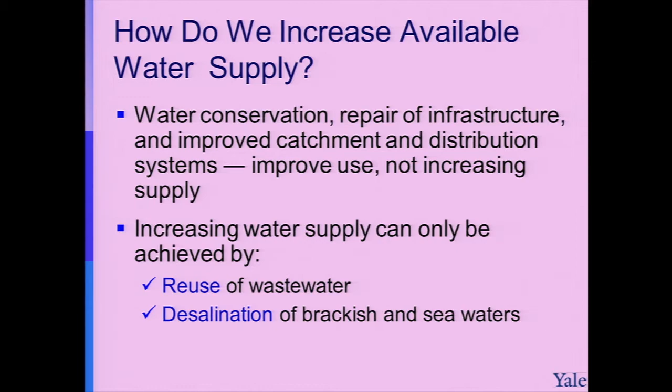The only way to get more water than what we can get from the hydrological cycle is to turn to engineering, my discipline, engineering and applied science - either reuse wastewater or desalinate brackish water or seawater. So my talk will focus on desalination of seawater, and I will address the question of whether it's really one of the ways to combat global water scarcity.

There was also a report by the National Academies about desalination, focusing mostly on the United States, discussing the technology, the economics, sustainability, and many issues. Those of you interested in desalination, especially in the context of the United States, I highly recommend reading this very comprehensive report.

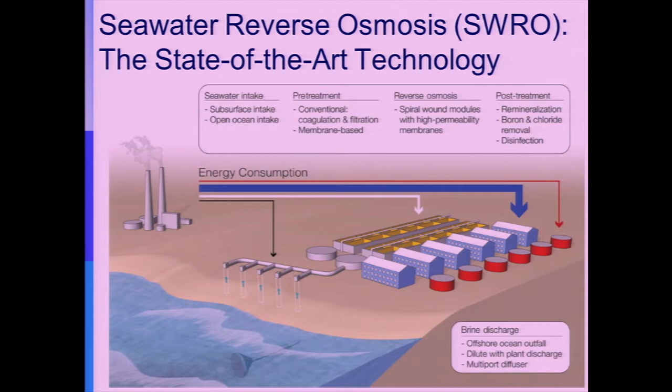In this technology - a typical reverse osmosis plant - the thickness of this line tells you roughly the energy consumed in each stage. You take seawater by an intake structure, it goes through some pre-treatment, similar to how we treat water for drinking supply - for example, if you take water from the Charles River and treat it for drinking water, it goes through a similar kind of pre-treatment. Then it goes through the heart of the process, the reverse osmosis unit - semi-permeable membranes that, in principle, let only water go through and retain all the salt. There's also post-treatment for other purposes we may discuss later, and whatever brine results is eventually discharged back to the ocean. So this is generally seawater desalination by the leading technology nowadays, reverse osmosis.

Numerous desalination plants were constructed all over the world, and I'll give you some prominent examples. In Spain, by this year, they completed a big master plan of 1 billion cubic meters per year - 1 cubic meter being 1 ton or 1,000 liters. It's a huge amount, and later we'll relate it to energy. This is mostly for agriculture, tourism, and potable use.

Israel, within a year, will complete a master plan of 5 desalination plants along the Mediterranean. They've already completed 3 big ones and will have 2 more, totaling 0.5 billion cubic meters per year - again because there's not enough water, mostly for agriculture. In my opinion, for the future, if there's ever peace in this area, water will play a very important role, and I think these desalination plants will play a critical role in that.

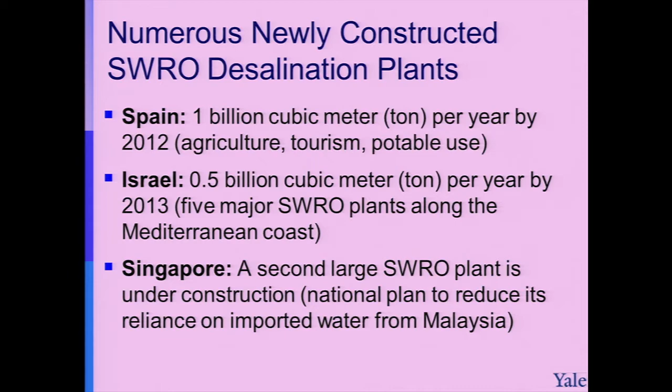In Singapore, they just finished their second desalination plant. They're already recycling all their wastewater, and now they'll have seawater desalination too, because they want to reduce their reliance on water from Malaysia - they were getting up to 60% of their water from Malaysia and want to reduce that reliance. So these are some examples.

For those of you who just want to see, since not all of you are scientists here, how a desalination plant looks - this is the example of the one in Hadera, Israel.

It's a 130 million cubic meter per year plant, the largest reverse osmosis desalination plant in the world. And they're just now finishing the one in Sorek in Israel, which will be 150 million cubic meter per year. This one is close to the power plant in Hadera, just south of Haifa.

Again, the heart of the process are these membranes, which are put into long pressure vessels. These are the membranes that do all the desalination.

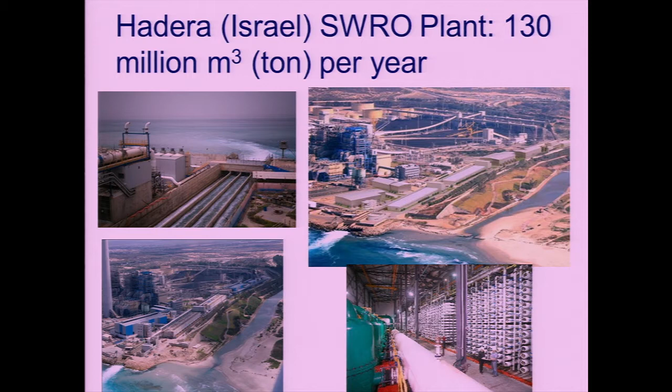So, a few words about desalination. In principle, it offers an unlimited and steady supply of water. The ocean is vast, and no matter what desalination plant you run, you will never deplete the ocean. So we have plenty of water - that's one good thing. Another good thing is you can produce enough water for potable use and agriculture without affecting the ecosystem. If you take water from rivers, lakes, and groundwater, you can have an adverse impact on the ecosystem. So that's another advantage.

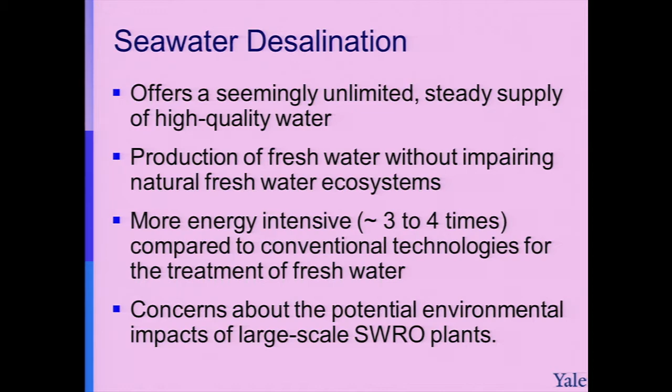However, there are of course disadvantages. It takes about 3 to 4 times more energy in the form of electricity to desalinate seawater compared to the way you treat, for example, water from the Charles River or from any reservoir. There are also some concerns - some of them serious, some maybe not - about environmental impacts, which I will touch upon during my talk. So there are some good things, but like anything, there are also some bad things.

Last year I was invited to write a review article in Science about the future of seawater desalination. In that article we posed 4 questions, which will guide my talk, and I'll show you even some newer data beyond what we presented there. We addressed what we thought were the key questions for desalination.

First, what is the energy efficiency and how far can you improve it? Because you can hear some people come with this magic solution to desalinate seawater with 5% of the energy of what you have now, and I want to set all the facts straight here.

Secondly, a lot of material scientists go into this area, and the question is: can material science and advances in material science reduce the energy consumption? I will highlight some of the hot areas of research and what's good and bad about them.

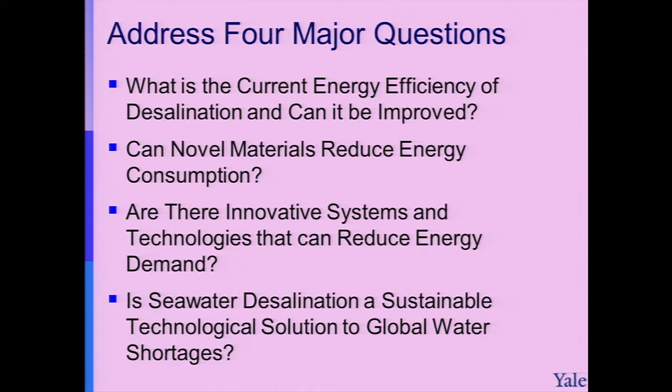Then I talk about some technology. I mentioned that reverse osmosis is currently the leading technology, but let's see - maybe there are other technologies that can reduce the energy. Lastly, we always need to ask if desalination is sustainable, and I will try to say a few words about the sustainability of seawater desalination.

So let's start with the first question: what is the current energy efficiency of desalination, and how much can we further improve it? I will start with some data.

Now, reverse osmosis technology was developed in the 60s, and the first desalination plant was roughly in the 70s. The energy consumption there was huge, and it dropped dramatically, and nowadays we are roughly about here. So I will zoom in on that part, and you see it here.

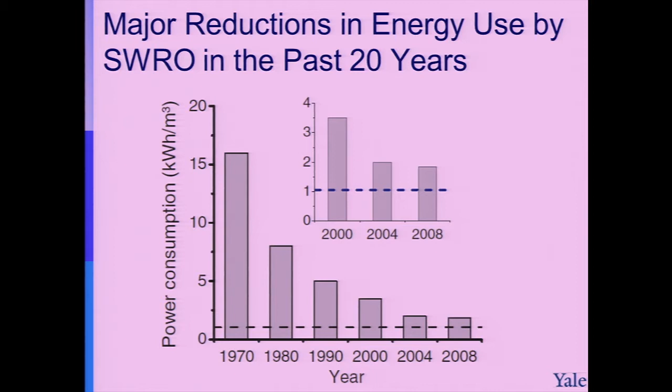Here you can see a dashed line, and this dashed line describes the minimum theoretical energy of desalination. You can use thermodynamics to analyze what's the energy needed to just separate water from salt. You assume a reversible thermodynamic process, which in principle isn't practical - it would be infinite in size and give you just a few drops of water. But this is a good reference to start with. I'm emphasizing that this thermodynamic limit is independent of the process you develop - you can't come up with another process and tell me you have something that can do it better. You can't.

So if you do this calculation for seawater, which is about 35,000 ppm, you see for zero recovery what percentage of fresh water we get from the seawater. If you take 1 drop, which is zero recovery, it takes 0.76 kilowatt hour per cubic meter. But again, it's not practical to have 1 drop - desalination plants work at 50% recovery.

You cannot have more than 50% recovery, because then you'd need such high pressure that the membrane cannot tolerate it. So all desalination plants work with 50% recovery. It means if you have one volume of seawater, you get half as fresh water and half as concentrated brine, and for this you need about 1.1 kilowatt hour per cubic meter.

And as you've seen here, we are about, again, the best RO plants are about 2. Now, emphasizing, this is just for the reverse osmosis stage, just for this desalination through these membranes.

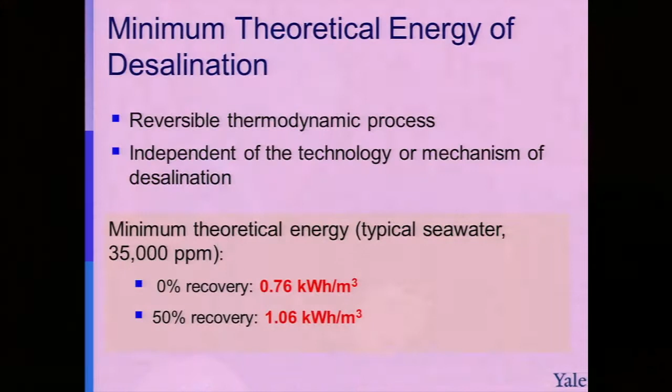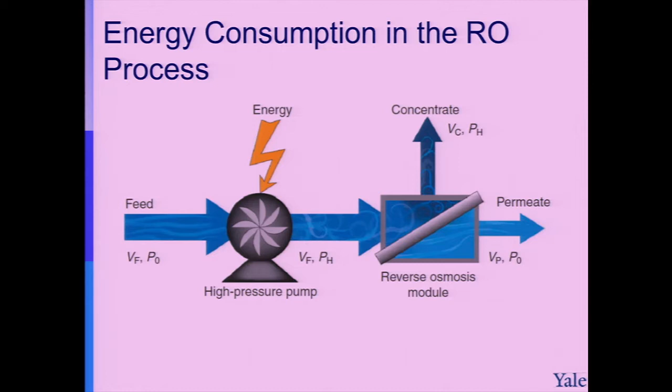Now, putting it in context to the minimum energy of desalination, the way you desalinate, and I showed you this picture of these long vessels, you can think about it that you are at the beginning of the vessel and you have the seawater here. And the seawater has a certain osmotic pressure, let's say 25 bars.

And as the water goes into the vessel, you start to get fresh water, and then the salinity of the water increases, and this will increase the osmotic pressure. So this is the exit from the vessel, where you get the brine and you collect all the fresh water.

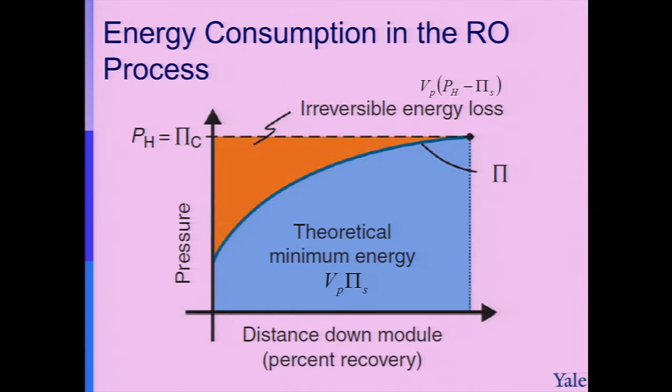So the way you operate seawater desalination, first, based on this diagram, you must apply a pressure at least equal to the osmotic pressure of the brine, because if it's not, the last part of the membrane module, the water will go in the other direction. You will not get desalination. So this is very important when you talk about the minimum energy of desalination.

And if you follow just the thermodynamics, the area under the curve is the theoretical minimum energy, which I mentioned is 1.06 for 50% recovery. And anything above that represents irreversible energy losses inherent to this process.

Now, in reality, you apply a little more than this pressure equal to the osmotic pressure of the brine, because there are some pressure losses when the water flows in the module, and there is some concentration polarization in which the salt next to the membrane is slightly elevated, so you need a little more pressure.

Now remember this one, when we talk about materials and if they can reduce the energy, I will refer to this graph again. So let's define another minimum energy.

Because we must operate at a pressure at least equal to the osmotic pressure of the concentrate that comes out of the pressure vessel, we can take this pressure and calculate what's the energy that's needed. And the energy, if you do the calculation, is simple. It's just you take the one cubic meter of product water times the osmotic pressure, you play with the units, and you can get 1.56 kilowatt hour per cubic meter.

So remember this number, this is what we call the practical minimum energy, and you assume that everything is ideal, the pumps and the pressure exchangers, which is not the case. And the best desalination plant, at least what they claim, has a reverse osmosis stage that uses about 2.

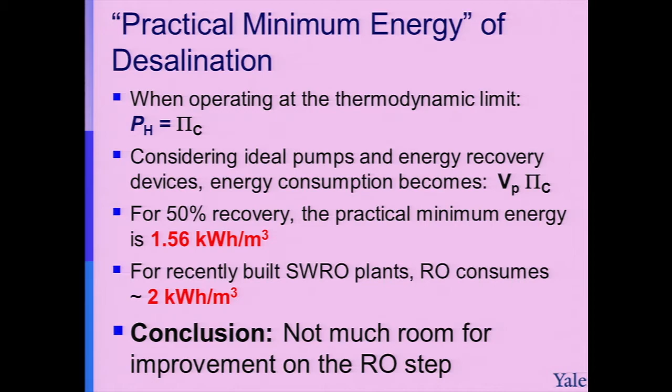So you can see now that, one of the conclusions, there is some room for improvement, but not dramatically. You cannot improve the efficiency by a factor of 2. But there is some room, and any 5 or 10% improvement, when you talk about billions of cubic meters per day, translates to a lot of energy.

So to put everything into perspective, the thermodynamics tell you it's 1.1. The practical minimum energy, because of the way we operate desalination plants, is about 1.6. The best desalination plant's RO stage gives you about 2.

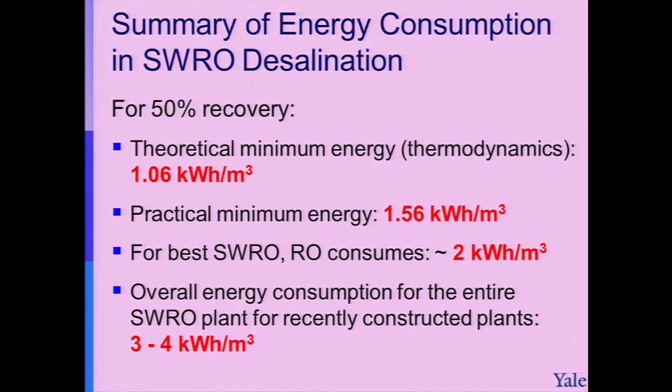But when you look at the reports for all the newly developed plants, the overall energy of the entire plant, you see it's between 3 to 4 kilowatt hours per cubic meter. So much more than what you see here. And the reason is, if you look at this plant, there are many other things that consume energy. You have intake, you have pre-treatment that costs some energy, you have some pumps, and all of these.

There is also some post-treatment, usually neglected. Many countries use desalination for irrigation, like Israel and Spain, and they use a lot of it for irrigation.

It's not enough just to treat the water here, because seawater contains boron. Boron at the pH of seawater is uncharged and can go relatively easily through the membrane. So in many plants that use water for agriculture, they use additional reverse osmosis stages just to reduce the boron to a low level so they can use it for agriculture. This consumes more energy.

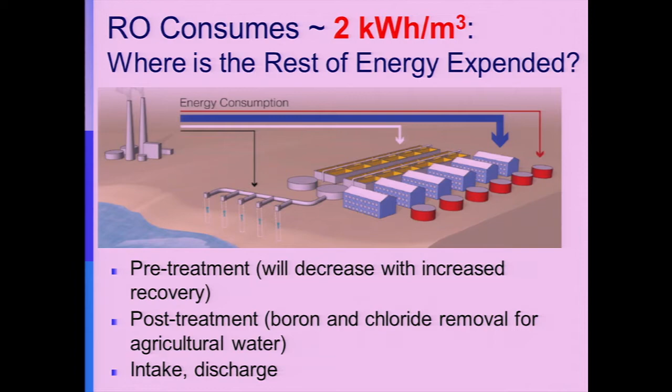So here I just gave you the big picture of energy and the values, so you can have the right perspective. Now let's see how we can have materials or technology that can really improve upon these energy limits.

Let's start with novel materials. Again, there are many material sciences that have brilliant ideas, and let's see if they can be applicable to desalination and if they can reduce the energy. The main challenge now, and the main driving force in desalination, is really to try to reduce the energy more and more, because there are some environmental impacts that I'm going to indicate very soon.

One of the hot areas of research was what we call high permeability or high flux membranes. The rationale by these scientists, mostly physicists, chemists, material scientists, was: if we create a very high permeability membrane, we may not need a lot of pressure to drive the force. And because the main energy source is the pressure, you think you can save some energy. We've seen many papers in the last 10 years in Nature, Science, and many prestigious magazines about this high permeability membrane.

One idea was, for example, to take aligned carbon nanotubes, because through molecular simulation they found that when water goes through the inside of these nanotubes, the rate of transport of water is about 10,000 times higher than what you calculate based on flow in a capillary, based on fluid mechanics. They also verified experimentally that you can get very high water flux. But nowadays no one has been able to show yet that you can get the very high rejection needed for desalination, which is 99.9%, so you can desalinate in one pass. So this is one of the hot areas of research.

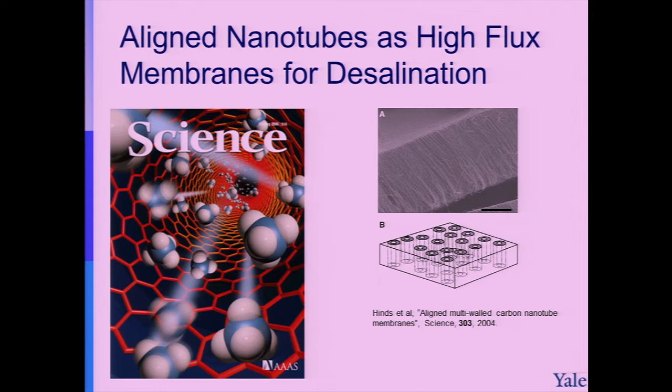Another relevant area, I won't show you slides, but aquaporin - these are the water channels. They also transfer water at a very, very high rate compared to the opening of the channel. The idea is that you can incorporate this kind of aquaporin into membranes and create this high water flux membrane.

But I will argue that it's not the case and it won't do anything, because in reverse osmosis what really governs the transport is not rate-controlled transport, it's osmotically or thermodynamically controlled, because we cannot operate the desalination plant with a pressure less than the osmotic pressure of the brine. For example, if you desalinate 35,000 ppm seawater at 50% recovery, the brine will be 70,000 ppm, which translates to 54 atmospheres or 54 bar. So you cannot operate the plant at less than that, even if you use a high permeability membrane - you still need at least this pressure.

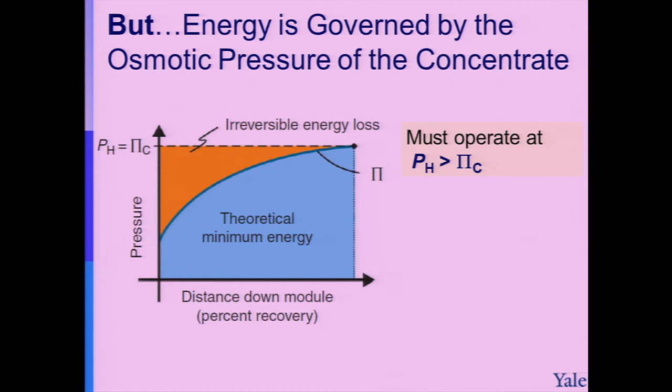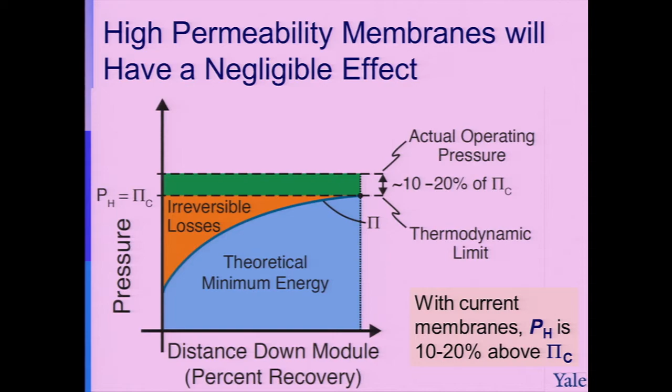As I told you, you always operate about 10% more because there's some pressure drop and non-idealities, like concentration polarization. It just happened that the improvements in energy made over the last 20-30 years mean the membranes we have nowadays already work in this range. We already operate at this range with these membranes, and we don't need high permeability membranes, because if you use them, you still need the same pressure or the same energy. The only thing it might save is maybe less area needed, but it will also pose a lot of difficulty, because with very high permeability membranes you get very high water fluxes, and you'll get a buildup of salt - what we call concentration polarization - and the flux will drop dramatically. So my argument is this high flux membrane will not be able to do anything to reduce energy consumption.

What I think you can do more is improve the current membranes to make them less prone to fouling. Fouling is the process where organic matter, bacteria, or anything else accumulates on the membrane and reduces its permeability.

Now, about the membranes used for seawater desalination, the gold standard are polyamide membranes. In the last 15, 20 years, these are the only membranes used for desalination. There have been numerous attempts by membrane company scientists to come up with different formulations, but you cannot come up with a better formulation that gives high permeability and very high salt rejection needed for seawater desalination. And again, this is the chemistry, the way you make it.

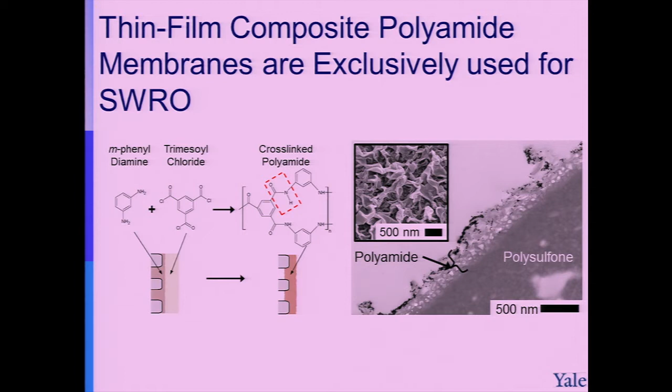Just notice that you have some amide links here, and this amide link is sensitive to chlorine and other oxidants that I'm going to describe soon. And roughly, when you make this membrane, you have some inherent roughness because of this interfacial polymerization process that involves diffusion and reaction, creating these things.

Now, these are the properties of the polyamide membrane, the best that we have now. We cannot find anyone yet better. And if you look at their properties, they have all the properties which are not good for fouling. Some of you material scientists talk about anti-fouling surfaces—these membranes really possess all the things we hope not to have.

They're relatively, I mean, not as hydrophilic as we hope, as you see from this contact angle. They have negative charge, and it's well known that you need neutrally charged surfaces to prevent fouling—classic work of George Whitesides at Harvard showed this with adsorption of proteins. Also, they have carboxyl groups, which can complex organic matter and promote fouling, and they're very rough. In our case, we found that roughness can promote fouling.

As I indicated, chlorine can attack the membrane, and the only way to prevent biofouling is to apply some oxidants, but you cannot do it because it will attack the membrane. And as you know from everyday experience, if you have any wet surface, immediately you get bacteria growing, even though there is nothing sterile.

So the current membranes, the way they operate, because you have this fouling, you need to increase the pressure beyond what I showed you so you can maintain the same water flux through the membrane. This increase in pressure translates to more energy. So my argument in this area—and we do a lot of work on this in our lab—is that if we think about materials and polymers, we really need to focus on having fouling-resistant reverse osmosis membranes and chlorine-resistant membranes.

Such modification will really reduce energy consumption because you need less pressure, and reduce the amount of chemicals needed to clean, and so on. So this addresses the second question: can materials really reduce the energy of desalination? The message is that high flux membranes are not the right direction—the right direction is really to have anti-fouling membranes.

So the third question: are there innovative systems and technologies that can reduce the energy demand? As I told you, the leading technology nowadays is reverse osmosis. Let's see if we can have some other system to reduce this. Remember, this is the area under the curve—these are the extra energy beyond the minimum energy needed to desalinate. Let's see how we can reduce it.

There is a way to do it, and you can do the simple analysis. If you take one stage of reverse osmosis, get some product water, and then instead of discharging the brine, you pump it at a higher pressure to a second stage—if you have two stages and do the analysis, you'll see you can save this amount of energy. So if the practical minimum energy of one stage is 1.56, with two stages it's 1.28.

In principle, mathematically, if you do an infinite number of stages, you will exactly follow this curve and approach the minimum energy of desalination. Even if you put just three stages, it will be relatively very close. So membrane manufacturers and companies that build reverse osmosis know this trick.

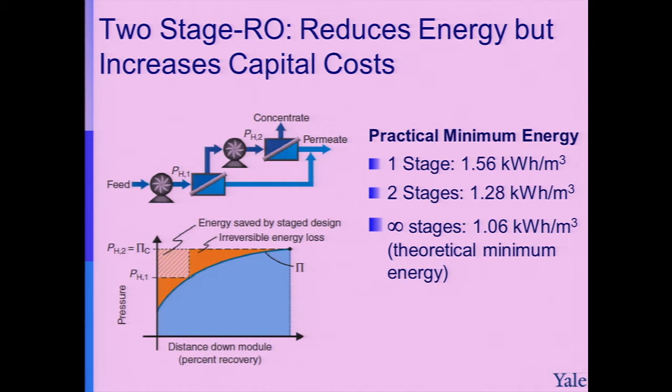But there are some ways to reduce it towards this minimum energy of desalination. This is one way. I would like now to highlight another process that we work on in our lab. We developed a process we call forward osmosis.

I will show you an idea of how it can be used to reduce the energy of desalination, if we can utilize waste heat. So here we go to thermal processes. If you can find waste heat from a power plant and use it as energy to drive the process, it may be good. One way to do it in forward osmosis: if you have this semi-permeable membrane with seawater on one side, instead of pressurizing it by hydraulic pressure, on the other side we put another solution of high osmotic pressure. Water will flow naturally from the seawater to this other solution.

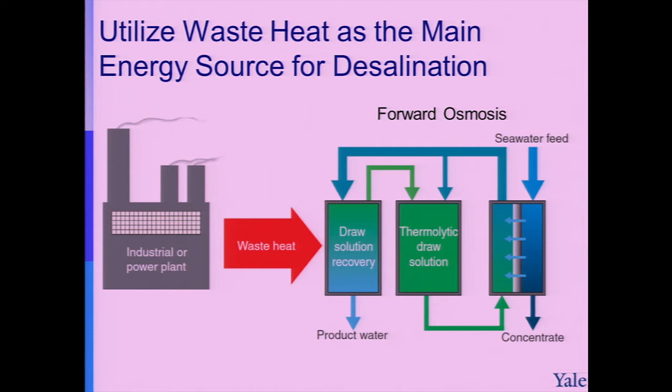But if you move to another salt and cannot separate it, you don't accomplish much. If you can come up with a solution we call a thermolytic draw solution - one you can decompose to separate the fresh water from the solution by applying low-quality heat - then it can work. One example we have in our lab is the ammonia-carbon dioxide draw solution, which we are working on.

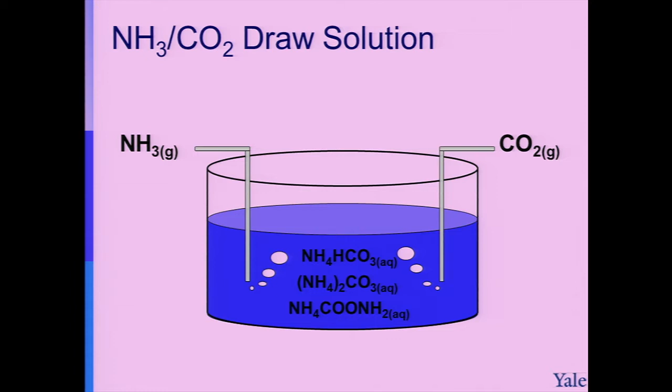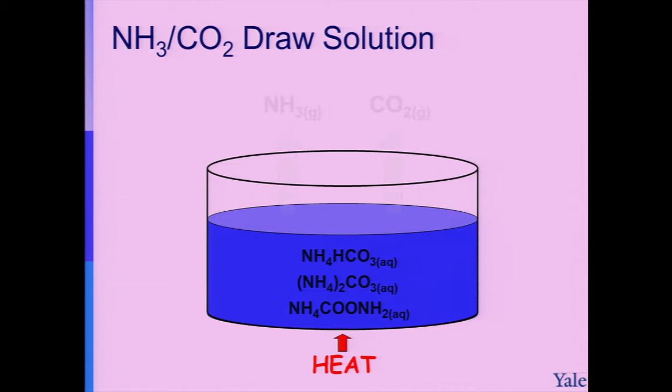If you take ammonia and CO2 and dissolve them in water, you get ammonium salts that create high osmotic pressure - these are ionic species. The fresh water moves to this high osmotic pressure from the seawater across a semi-permeable membrane. If you apply waste heat at atmospheric pressure, you need 58 degrees, but with a slight vacuum it can be much lower. Then you can convert these ionic species back to ammonia and CO2, separate them, and get the fresh water.

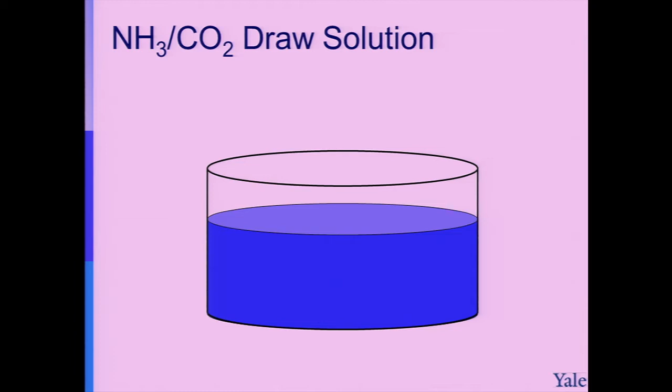I'm emphasizing here you will need much more energy because thermal processes are not efficient, but all this energy comes in the form of waste heat from a power plant that otherwise cannot be used to produce electricity. In a steam turbine, this is the waste heat at the end of the turbine that you cannot do anything with, so usually you just discharge it to the environment.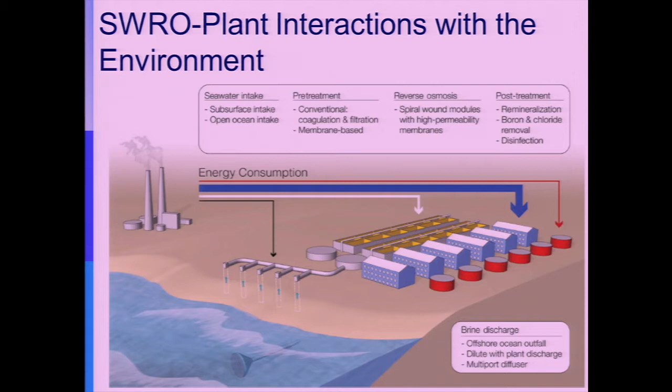The interaction with the environment will be through the power plant and greenhouse gas emissions, and the intake structure that can affect some aquatic organisms. We'll also have discharge of brine to the environment, as you see here. The first issue at the intake is impingement and entrainment, which you can control with the right intake - submerged intake, sieving - it's a problem you can overcome.

The greenhouse gas emissions can be significant, and I will show you some numbers in the last slide. There's also brine discharge - you can discharge to the ocean brine that's twice as concentrated as seawater, and it can create a lot of problems.

Unfortunately there isn't enough extensive data in the field to show the impact, although we know there is some impact, but we're not sure how far or how severe it is. But from an engineering point of view, if you locate the plant appropriately and design a diffuser that discharges the brine to the ocean in the right way, you can overcome it.

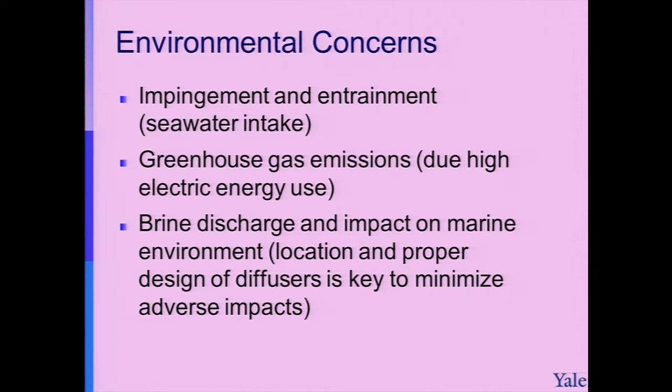So the last slide, just before the conclusion: the major hurdle for implementation of desalination is energy. Again, in California, the desalination plant in Carlsbad took 12 years to approve - the same issue applies elsewhere.

So let's look at some numbers. A typical reverse osmosis plant uses between 3.5 and 5 kilowatt-hours per cubic meter - these are existing plants. We know how much kilowatt-hours per cubic meter you need for seawater, so we can calculate how much CO2 is produced. The CO2 emission, using a typical power plant, will be 1.6 kilograms of CO2 per cubic meter of fresh water.

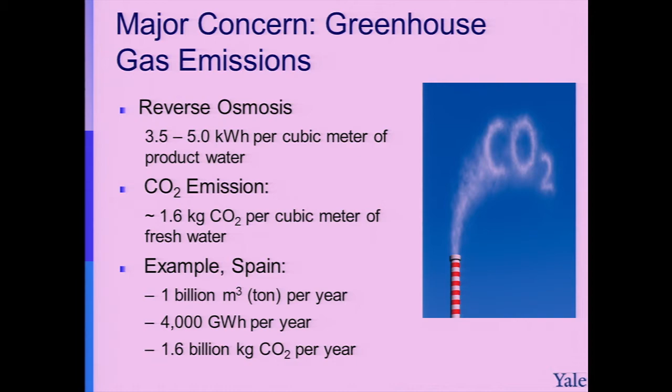Let's now take the example of Spain: 1 billion tons per year. That translates to 4,000 gigawatt hours per year, or 1.6 billion kilograms of CO2 per year. You can calculate the equivalent in how many cars you'd add to the street, and it'll be a huge number. So anything in desalination, even if you improve energy efficiency by just 5 or 10%, it would still be a major contribution.

So, some conclusions. As I argued, real gains in desalination can be realized by development of fouling- and oxidant-resistant membranes. The idea of having a high-flux membrane will not work for desalination. It's not the right way to go.

Although I didn't mention it in detail, I briefly noted that boron removal requires extra desalination stages. If you can find a membrane with higher rejection, it would be much better, but the problem is that membranes operate on what we call the selectivity-permeability trade-off. If you try to make it more selective, it becomes less permeable to water, so you cannot improve both water permeability and selectivity at the same time. And you cannot sacrifice permeability, because reduced permeability means you need more energy for desalination.

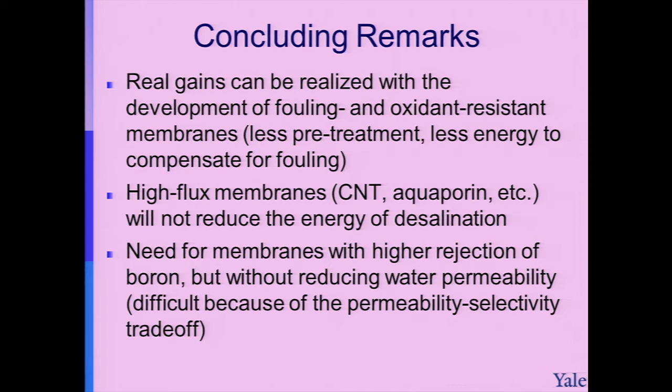Since this is for a broad audience, I thought I'd give some recommendations, like a last slide. As I said, there are many other options for getting more water, like conservation and so on, but these options alone will not be enough to meet the water demand we have nowadays.

This is one conclusion. The second is that while seawater desalination must be considered only after all other options have been implemented, it should still be viewed as a crucial component of the portfolio of water supply. You cannot say it cannot be used at all. It's part of a portfolio of water supply, and there is some room for desalination.

Lastly, for water-scarce countries that already implement all other measures, desalination may serve as the only viable means to provide water supply. There's no other way to do it, and this is what's happening in the Gulf countries and in Israel. Some argue other countries could do it better, but that's a topic for discussion. So, thanks to the funding agencies and the whole group, and thank you very much for your attention.

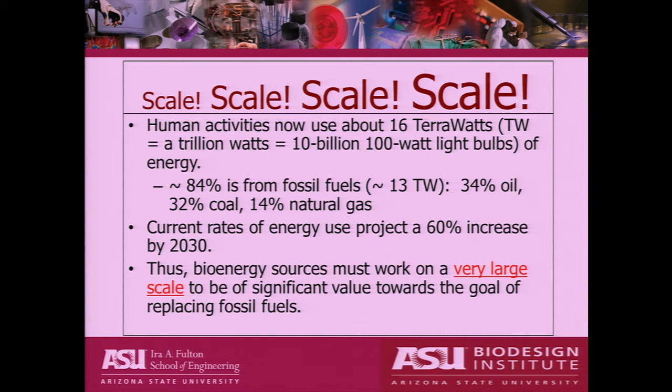More on scale: there's our 13 terawatts of current fossil fuel use. On the good side, the sun is sending to the Earth continuously about 173,000 terawatts of energy, way more than we need for human society. So we've got a lot of upside potential of completely renewable energy coming in from the sun. Isn't that great? It's great.

On the other hand, if you look at photosynthesis on the planet, capturing sunlight energy into biomass, its energy value is somewhere around 140 terawatts. Natural photosynthesis and agriculture are collecting about 140 terawatts. Human society is using it through fossil fuels at about 10% of that which is captured into natural and agricultural ecosystems.

This is the heart of the problem. We demand an extraordinarily high fraction of the natural energy flow through the biosphere, and that's why we're getting more CO2 and all the other associated problems. So in this context, 13 terawatts is really a huge number.

Now, I work in the microbial bioenergy business, and I think microbial bioenergy can play a big role in large-scale renewable energy. That's why I do research, that's why I'm here talking today. And there's a big if here.

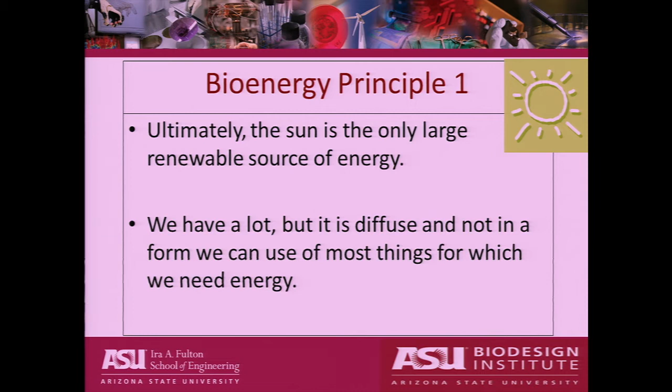Ultimately, the sun is the only real significant source of renewable energy on the planet. We have a lot of it, 173,000 terawatts all the time. But it's very diffuse—it's not in a form we can use to drive our car, fly our airplane, and do things like that. So it's not in the right form, although we have plenty of it. We have to get it in the right form.

To get it in the right form, we have to understand the second principle: the energy is in the electrons. Manny was just talking about all that electrical power needed to desalinate water. It's obviously true for electricity, but it's true for almost every other form here too. So our goal in renewable energy is to take sunlight, very diffuse radiant energy, and convert it into forms that hold high energy electrons that human society can readily use.

That's where the energy comes from. We have some CO2 in the atmosphere, and we use photosynthetic organisms to capture the energy and electrons from the water and make biomass. They make themselves. We can then use that biomass directly, like a campfire burning wood, or after some processing to produce things like hydrogen, methane, hydrocarbon fuels. We can then use this to generate electricity or motive force to run our society.

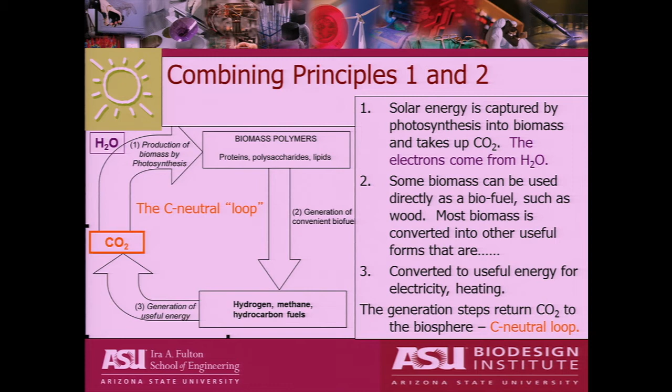That returns the CO2 back to the environment. So what we have here is the carbon neutral loop. CO2 comes in, gets energized with energy from the sun and electrons, forms biomass, we go around, extract the energy out, return the CO2. This is a carbon neutral loop using renewable energy. This is what we aspire to do, what we need to do more and more of.

Comparing that to fossil fuels, it's really the same principle. Fossil fuels, all those hydrocarbons, coal and petroleum and things, are all the product of photosynthesis, the same starting point I showed you in that left-hand corner. It's the same principle, but for one thing: the difference is that those fossil fuels were produced hundreds of millions of years ago.

And we are now mining hundreds of millions of years of photosynthesis and combusting it in a couple hundred years. So you can see why the CO2 concentration in the atmosphere must be going up so fast, because of the mining of hundreds of millions of years of photosynthesis.

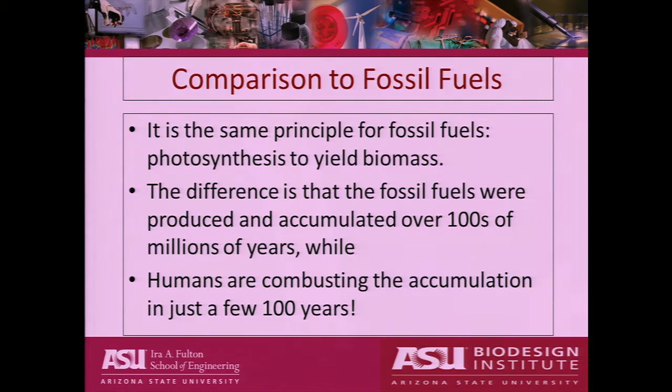So what we really want to do is contemporary photosynthesis, not fossil photosynthesis, and then we have renewable carbon neutral energy, and that's our goal. We also want to replace the fossil fuels with this contemporary energy. It's renewable, and then we satisfy all criteria, including Manny's desire to have renewable energy as the source for the grid. So the idea is to replace fossil fuels with this renewable energy using this format.

Now, one last piece of perspective, and that is residual biomass. Nature and the agricultural system do a lot of photosynthesis. There's a lot of what we call residual biomass. If you think of agriculture, you've got agricultural residues, food processing waste, animal waste, and things like this. If we could collect all of it, and convert all of it to energy, we could satisfy roughly 25% of the Earth's humans' energy demand, roughly.

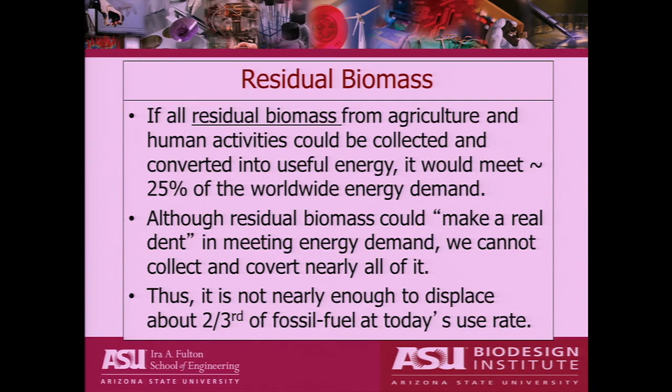We can't do that. We can't get that much, and we wouldn't want to, but it's a significant amount. The key thing is, this is not nearly two-thirds of our human fossil fuel use. It's important, we should be doing this, we do it in our center, we work on this, but it is not going to achieve the solution I'm talking about. So residual biomass is not the answer. Residual biomass is not enough.

And so the conclusion is, if we want to implement the solution I've been talking about, we need a lot more biomass. We don't have enough biomass. We need to carry out a lot more photosynthesis, and we need to do it in an environmentally acceptable manner. And that now starts the story about what might be a good part of the solution to renewable energy in the future.

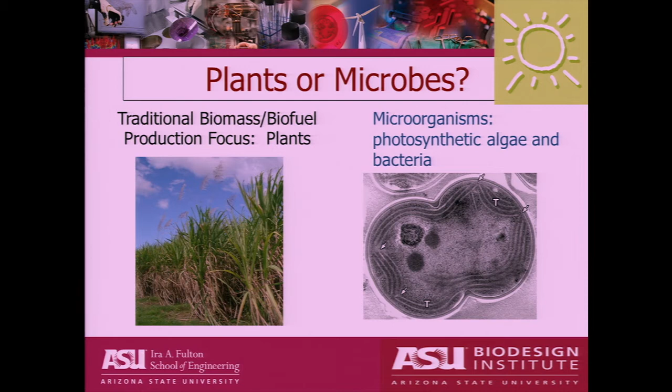So we want to do more photosynthesis. Who does photosynthesis? We have plants that do photosynthesis, you recognize those. And we have microorganisms that do photosynthesis, maybe you don't recognize those, I'll tell you some about those in a minute. So we have algae and photosynthetic bacteria. Which one should we choose? Should we choose plants or microorganisms?

Well, I've made a little list here, a 7 bullet point comparison of photosynthetic plants and photosynthetic microorganisms. 7 points, they're lined up. I'm not going to talk about all 7 because I don't have time, just a few highlights. So first, let's talk about the use of arable land, the land on which we grow our crops for food.

Of course, if you're going to grow plants, you have to grow it on arable land. That's by definition. Microorganisms, on the other hand, don't grow in soil. They grow in water slurries, and you can put them anywhere. So there's no competition for arable land when you use microorganisms.

Second, how about the areal productivity, how much we can produce? If you look at the productivity of different types of biomass, depending on the type of organism, the rate of output of biomass, the product of photosynthesis, is somewhere between 10 and 100 times higher for microorganisms compared to plants. Plants are really quite inefficient at collecting solar energy and turning it into biomass. They produce some neat stuff, but not at a very high rate. Microorganisms are much faster, and when you get 10 to 100 times higher productivity, you start getting into the realm where you can conceive of producing terawatts worth of biomass energy using microorganisms.

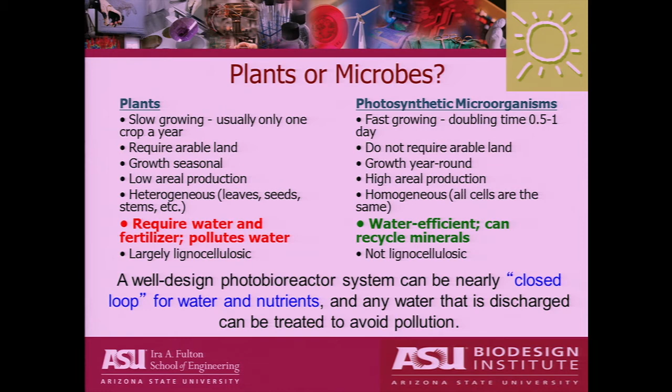So now I'm going to tell you about some things that we are doing to try to implement this idea of using microorganisms to produce renewable energy from the sun. The first thing I'm going to talk about is what I call new biomass, or biopetrol, from photosynthetic bacteria.

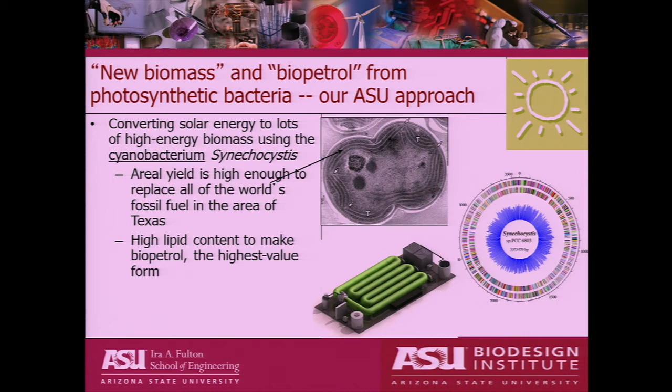We have a very large research program at ASU exploiting the cyanobacterium Synechocystis. Here's a picture of Synechocystis. This is a couple of micrometers across. It's a bacterium, not algae. It's a very simple microorganism in terms of its genetics. It's very well understood — this is a big advantage of it. It's a very robust, fast-growing organism.

It's also an organism that naturally contains a relatively high amount of lipids, and you can see that in the picture. If you look here, you can see all these lines running through — those are what we call the thylakoid membranes. That's where the organism puts the apparatus to collect sunlight energy and convert it to chemical energy. So an organism like Synechocystis that's growing very well, very happy, is loaded up with membranes. Membranes are mostly lipids, and lipids are oil. So we produce these organisms with a lot of lipids.

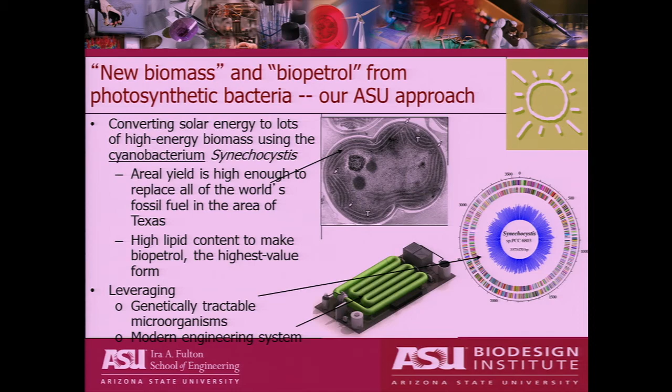We can harvest the lipids and use this as a substitute for petroleum for a lot of transportation fuels. This is an organism that is genetically tractable, completely well understood. We can modify it to help it do this job for us — that is, making lipids better than it would naturally do — and we are working on that aspect. We also use some very modern bioengineering tools, which is what I work on, to create the systems we call photobioreactors that make this happen in practice.

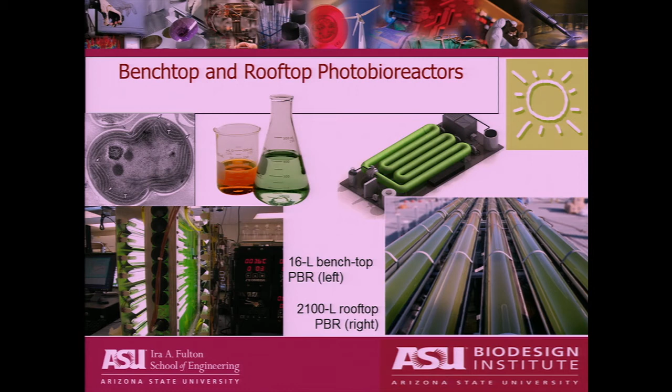So here's some pictures of it. Here's the organism again, and our little schematic of the photobioreactor. But here are some real ones we are using. Here's one we use in the laboratory — it's 16 liters, very highly monitored and controlled, good for careful fundamental studies in the lab. Here's a picture of one that's outside, about 2,000 liters, on the roof of one of our buildings, which we can use for field studies and test out in the real world conditions of the Arizona sun.

So the value proposition, as I've just explained it, is this: we're able to create, under controlled conditions, a lot of new biomass. Notice I wrote it in green font — you get the idea, it's photosynthetic new biomass — and we can use this to supplement the normal capture of biomass from agriculture and nature.

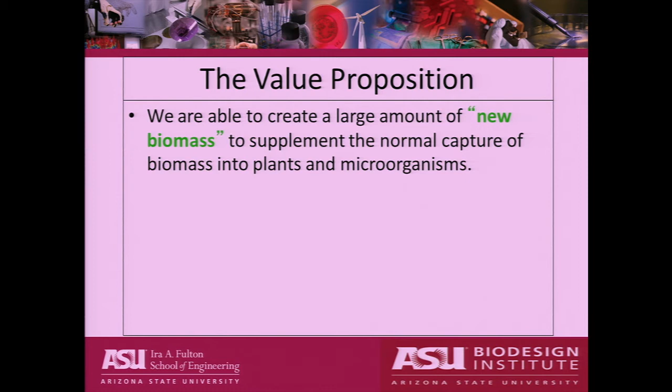So we do this under controlled conditions here. We become what could be viewed as a solar-powered factory for renewable energy forms. And because of the high productivity per unit area, we could actually approach multiple terawatt levels of production, at least in principle. It's not impossible. It doesn't say it's easy, but it's not impossible. So we could do it.

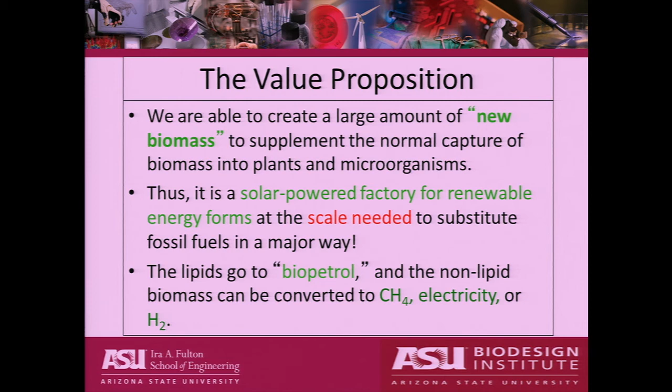So what we do is capture the lipid part and take it off to make transportation fuels, and the rest of the biomass we get the energy value out into other useful forms like methane, electricity, and hydrogen. Now let me show you what that looks like graphically - same information basically, but in a very nice graphic format.

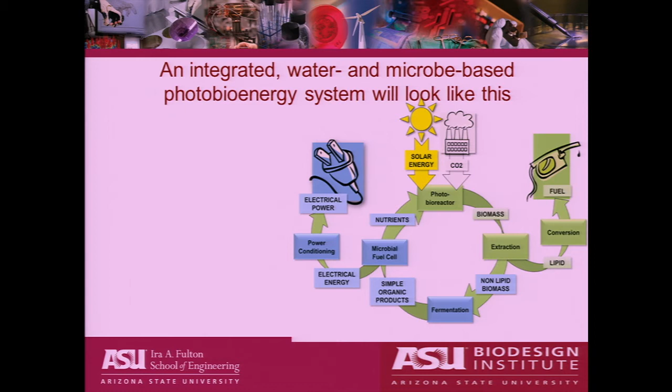Here's a picture of what I call an integrated water and microbe-based bioenergy system. First of all, I want you to notice there's a loop here. It's a loop, okay? So this main action is going on over here. This begins with sunlight and CO2. The sunlight, of course, comes from the sun. I'm showing the CO2 from a power plant - it could come from the atmosphere itself. But anyway, some CO2 input coming in.

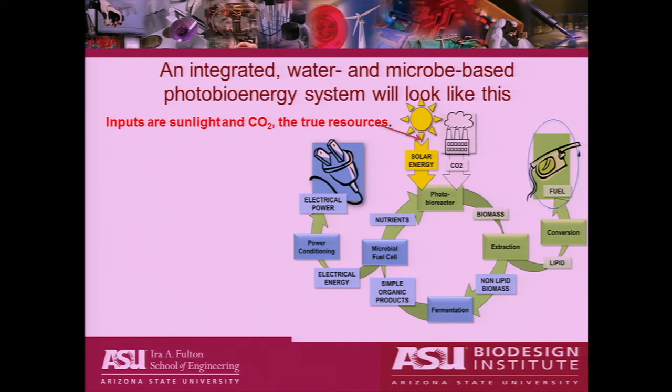We have a photobioreactor in which we're growing the organisms. We make the new biomass. It comes over here. We extract out the lipid portion that goes off to make transportation fuels, jet fuel, diesel fuel in particular. The rest of the biomass then comes around here, and we go through a couple of steps of fermentation and extraction of energy. I show a microbial fuel cell here to make electrical power, but you can make methane or hydrogen or something else over here.

Extract all the energy out of all the carbon on this side, and then once you get to that point, you're left with the water and the nutrients, mainly nitrogen and phosphorus, which you just recycle. So you see, everything is going around and around the loop. The water goes around the loop, the nutrients go around the loop. What comes in is renewable energy from the sun and CO2, and what comes out is a couple of different forms of renewable energy. Energy in, energy out, everything else around the loop.

Yeah, pretty neat idea. So, that was pretty good, don't you think?

Yeah, I think so. But I got something better. We've got another step that we're working on. It's even better if we can make it work. It's a second strategy here, just to introduce that.

We're trying it another way, and that is to have the photosynthetic bacteria pump out the feedstock. So we don't even have to harvest the organisms, but we harvest the product. So we have now a large ARPA-E, this Department of Energy project on this.

So we still use sunlight and CO2 as the prime resources. We still use cyanobacteria to do the job here, but they produce the product, and we can avoid the hassle of having to harvest the organisms and squeeze out the lipids and all that kind of stuff, which is actually technologically not so easy to do.

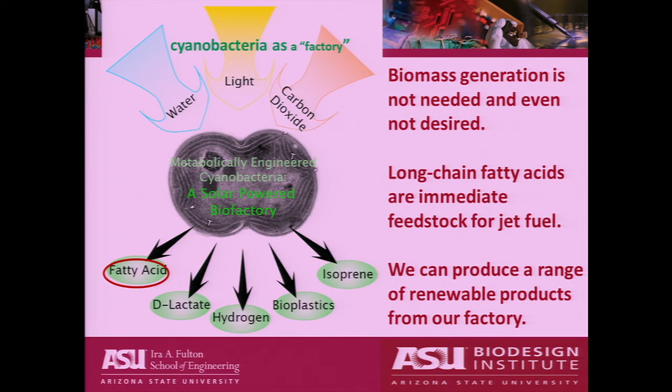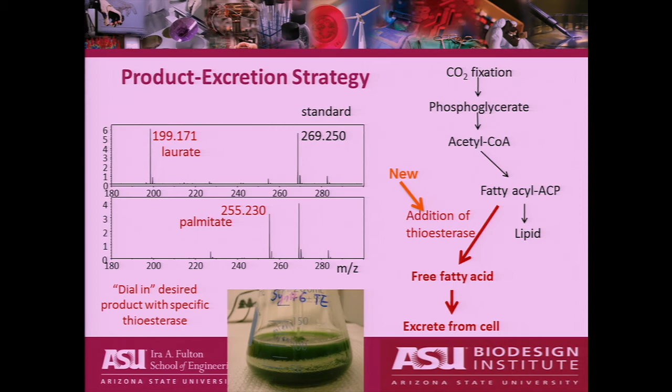We then harvest those and we can convert them with a lot more ease to the transportation fuels like jet fuel and diesel fuel. There's a picture of some of the lauric acid coating the flask here. That's, of course, not how we would normally harvest it, but it's good for the picture so you can actually see it's being done.

So in the second strategy, what we're doing here, we do all these good things in the water, and we don't really need to input nutrients because we're really not producing biomass. And we don't need to harvest and convert the biomass because we're really not producing biomass. We're letting the biomass produce the product. And this becomes truly a photosynthetic factory. The organisms are themselves a little factory run by the sun, converting CO2 into useful products like this.

And so the analog are chickens.

Chickens, right? You want to have an omelet. You don't go and kill the chicken to get the eggs from out from the inside. You let it lay the eggs, and you harvest the eggs. So, it's like a chicken.

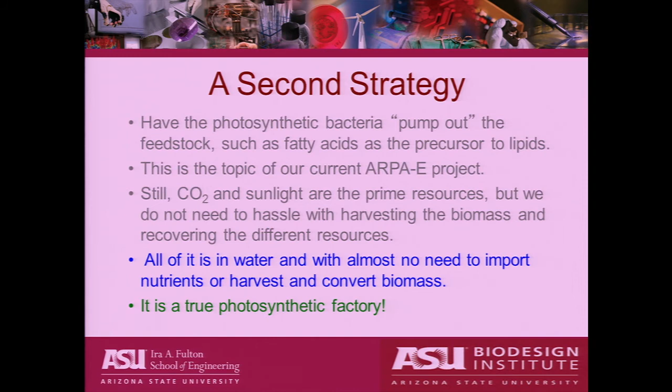Photosynthetic factory. Okay, I'm at the end, and I'm just going to sum up the main take-home lessons here from my talk today, and then we'll have some questions.

So the first take-home lesson is we really need a lot of energy. We use a lot of energy, and we need to replace fossil energy with renewable energy at the terawatt level. Many terawatts of energy need to be replaced. So we get the same good services, but we don't need to keep using so much fossil fuels.

Photosynthetic microorganisms can stand at the heart of this, not all by themselves solving the problem, but they can be a key component in doing this because we can produce high-energy biomass, and because of the high areal productivity, we can do this at rates that can approach terawatt levels.

And we do it in the water slurry. We don't do it in the soil. So we can create a closed loop where the water and the nutrients are cycling around, and we just have energy in and energy out. Diffuse sunlight energy in, concentrated useful energy out from the system.

So in this way, it's all done in the water. We are letting the water work for us, not against us, to generate enough renewable energy to help us replace fossil fuels and make our human society a lot more sustainable in the decades to come. So thank you very much.

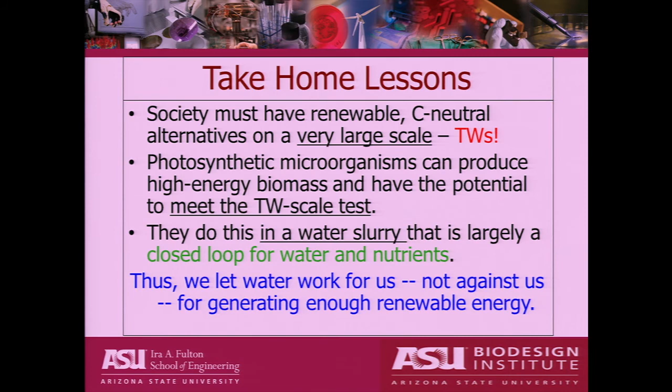Hello, my name is Ramon Sanchez. I come from the Harvard School of Public Health and the Harvard Extension School. And my question is about...

What are your procedures to make sure that some of these species, like Synechocystis, that is extremely aggressive, don't pollute large bodies of water? We have been farming microalgae here for 10 years, and every time that we want to go into large scale wastewater treatment or something, the municipalities are extremely concerned about that particular issue, that some of these algae strains may invade large bodies of water or rivers or the ocean. So what are the safety protocols that you have in place for that?

Okay, so I'm going to answer that in two parts. The first part has to do with the direct answer about what safety protocols we have. As I described in my talk, this is basically a closed-loop system, and so we're not just letting things get out. We do produce some biomass in these systems, and it's harvested and it's under control, and it goes off to do what it should do to make energy. So we're not just letting these things out into the environment, and these are closed systems.

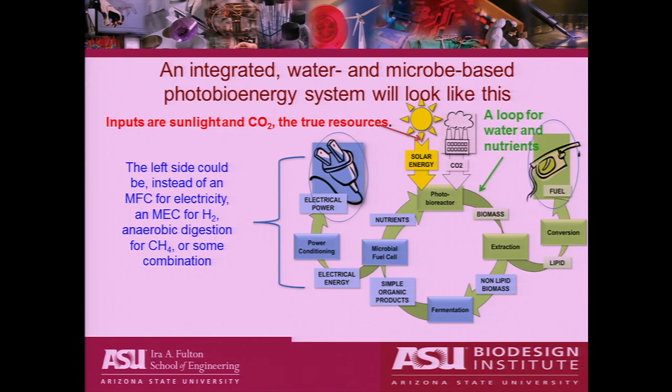Can you say how far along you are on these alternative energy generation processes? They're in a similar state of science and technology development as these photo bioenergy things. We're making very rapid progress, but we're nowhere near having this ready to sell for large-scale systems. But it's going very quickly. We just created a company to develop and commercialize this particular thing, so we're very enthusiastic about it.

Thank you. Thank you. Hi, Ron Swag.

I'm from Woods Hole, and in 1978 I served on a Congressional Office of Technology Assessment panel that looked at the conversion of energy from algae and plant material to biofuels. At that time, looking at the laws of thermodynamics and the basic physics of this, and the critique done by Kress and Dimitrov from MIT relative to what you can expect to get out of the energy relative to what goes into it — the basic balance of energy equation.

The notion I've read and understood at the time is that it takes more energy to get the energy from the material than you get as a result of the process. I just wonder if your research has advanced that.